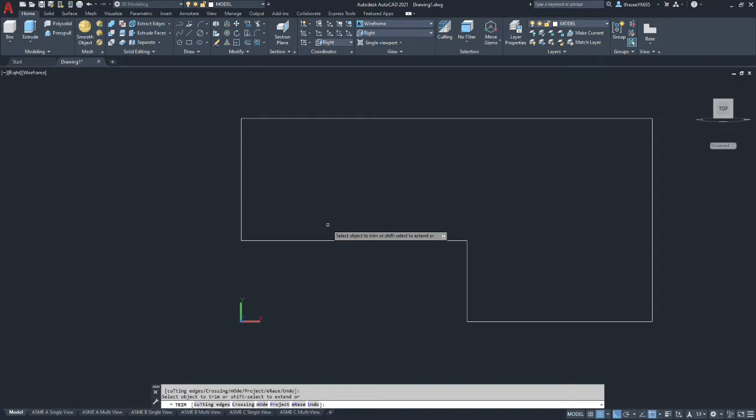Now it does have a radius out here, so we're going to use the fillet tool, and we're going to set our radius as 6 millimeters as the drawing says, and put that on the outside edge.

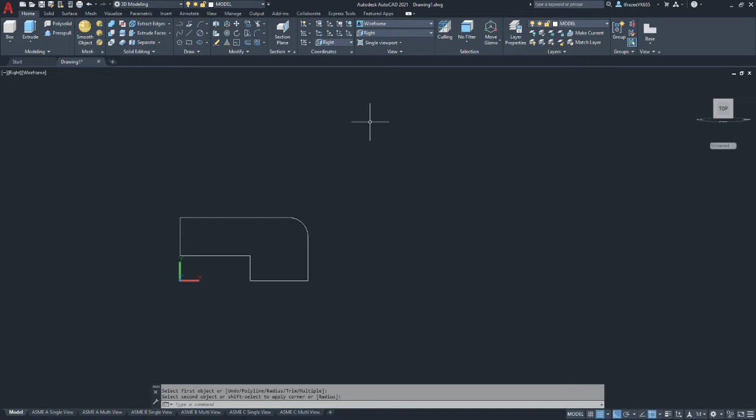Now let's place the circle that will be the handle. According to the drawing, it appears to be 50 millimeters from the base, so let's put in that 50. And then the center of it is 140 diameter, so that's going to be a 70 radius offset from there. So the intersection of those two lines is the center of our circle.

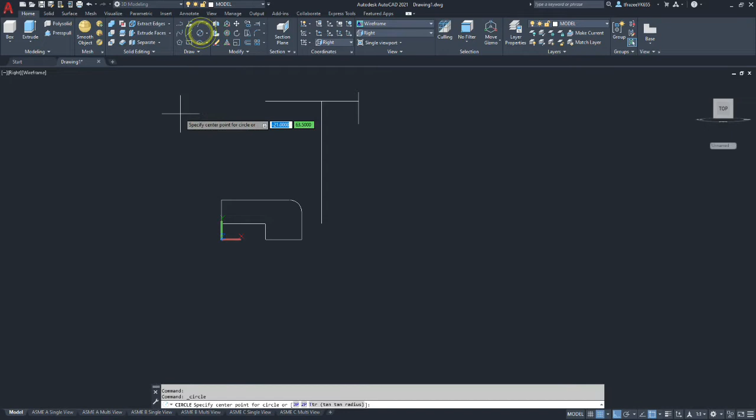So we'll do another little extension here. All right, so where those two lines intersect is where our circle is going to be, and it's a 20 millimeter diameter, so I'm doing a circle by diameter that's 20. And now we can delete these other entities, we don't need them. Okay, so those are positioned in relationship to each other like they should be.

And I do want to throw some other construction in here. Later, we are going to have to make a spoke that connects the hub with the rim, so I'm actually going to switch to construction layer. The hub intersects a point that's on center line 15 millimeters in, and then it picks up the center of the circle. So let's do that, let's offset by 15 millimeters.

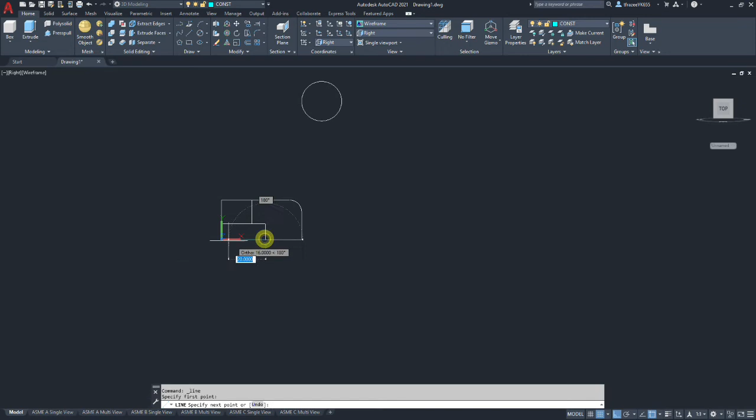So I'm going to draw a construction line that would be on center, and I'm going to extend the line I just offset by 15. So the intersection of those two lines should generate the line we're going to need later.

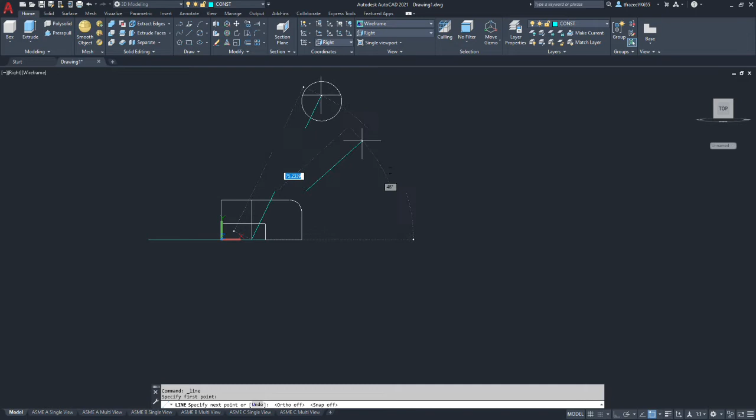I'm going to turn ortho off and the snap grid, and need to have center selected, and I'll draw a line that goes to the middle of the arc. So this line will be a construction line that we can leverage later to make our spoke.

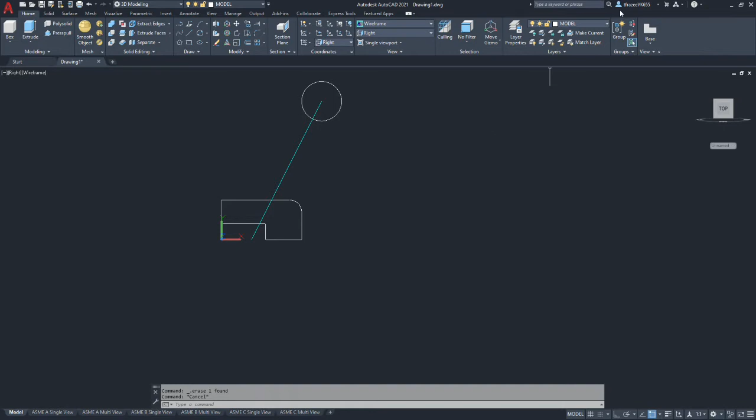So we'll go ahead and delete these other things here. And then I'm going to switch back to the model layer, and I actually think I'll make the construction layer invisible for now.

So it's not there. Okay, so we want to revolve this as a revolve solid. So I'm going to turn this grouping into a region. We're going to go to Draw, Region, and it says, what do you want to make in the region? I select everything, and I hit Enter. And it should be all in one region now.

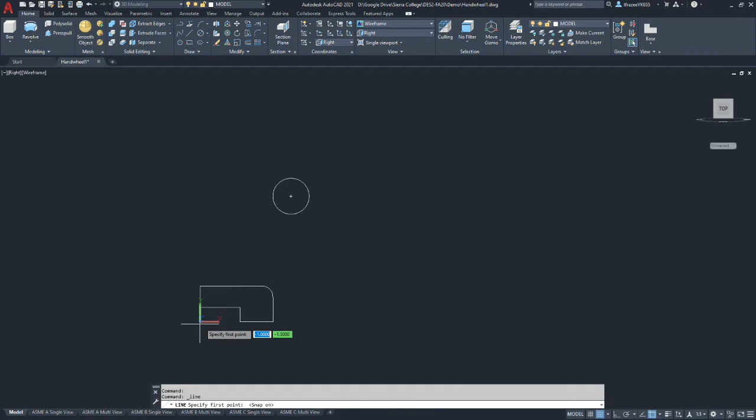All right, so before we revolve this, we need to create a line, and it's just going to be used for revolving. So we'll go from origin over to the right. And that's all that line's for.

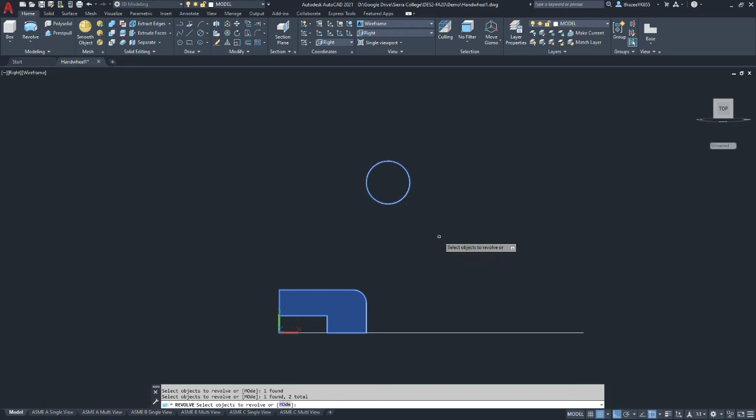Okay, so now we go to the revolve command, and we're going to revolve. We're going to select our region, and we're going to select our circle. We're going to hit Enter to accept those, and then it's asking, what do you want your center of rotation to be? And I want it to be the object I drew, object, and I select my line.

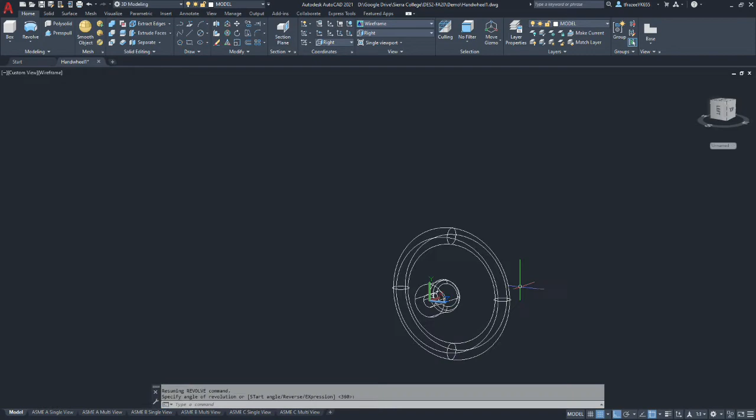And now it's asking you how many degrees you want to go. So I want to go 360, which is the default. So we now have these two bodies. They're not joined together, but we've effectively created two of the bodies we need to make the hand wheel.

Okay, so now we're going to draw one spoke, and we're going to model one spoke, and then we are going to do a polar array on that spoke. We'll have to explode the spoke, its array, and then we should be able to merge them into one solid.

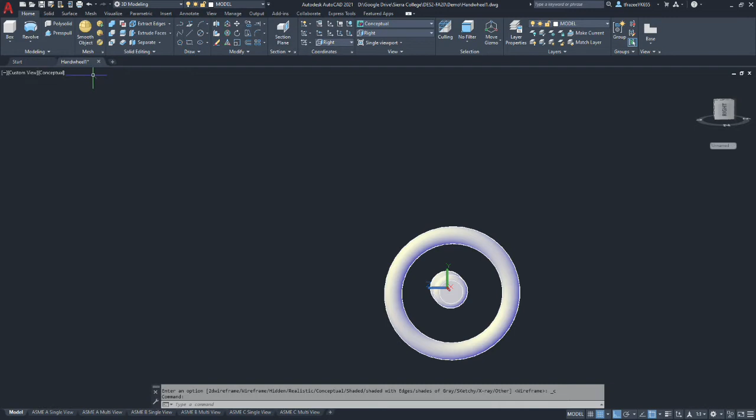Okay, so let's go back to wireframe. And we're going to go back to the view we were in, which was the right side view. So let's go plan. Okay, we're back in our current UCS.

We're going to go back to the layers, and I'm going to make that construction layer visible. Okay, so we have our blue line, construction line we want to use. And we're going to allow that spoke to intersect the other two bodies.

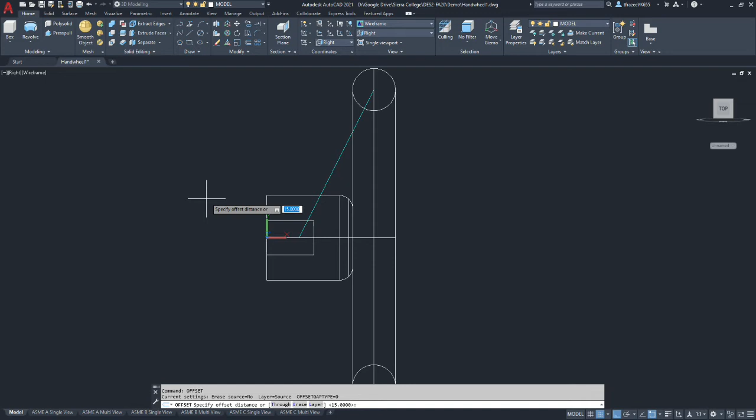All right, so we're going to go to offset. We're going to do offset, but before we do offset, I want to set my layer setting. Layer, and I want the offset to be in my current layer. I don't want it to stay in the construction layer.

And we're going to offset half the thickness of our rib, which is 3.5, and we're going to go in both directions for a total of 7. And now we're going to connect the endpoints. I'm going to turn ortho off and the grid, and we'll connect the endpoints of the piece.

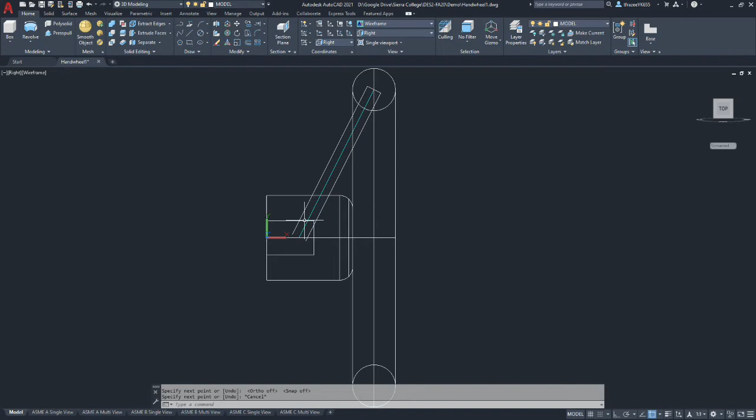Now we don't want to create a solid inside our bore that we already made, so let's create a line on the endpoints, and we'll use that to offset outward. So let's go an offset of 12.

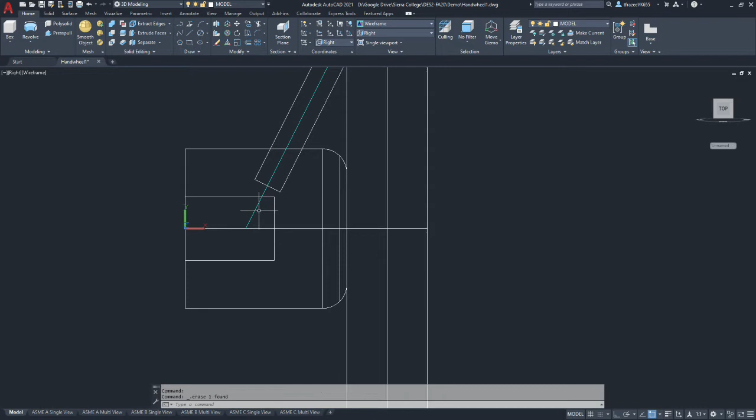Okay, so our bar shape is still going to intersect. What we're going to do now is we're going to go to trim, and we'll trim off these two tails here, and then we can delete the construction line now and the other pieces.

So we have this shape now that is drawn in the right view that we can either use the extrude command or we can use press pull.

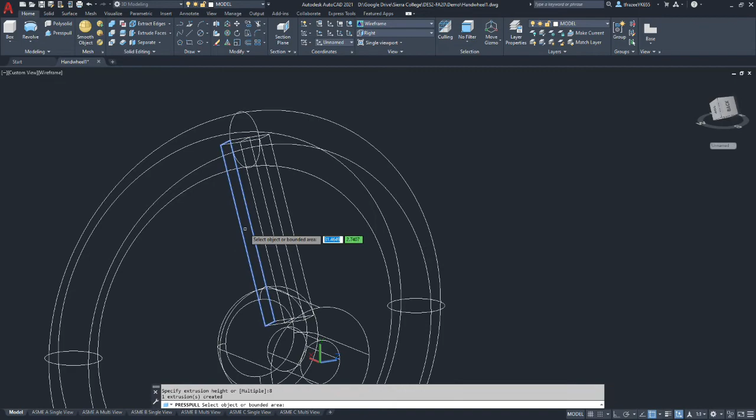So if we use press pull, the thickness is 16 total, so we'll go 8. And then we're going to repeat the press pull on the opposite side, and we're going to go another 8. That gives us our profile. So by doing the press pull on top of the existing press pull, we've created one solid there.

Now we have a dilemma here. We can try to do fillets all at the end, or we can try to do some of them before we do this revolution. I'm going to risk it and put them on this piece because AutoCAD's not the best at doing fillets, so let's give that a shot.

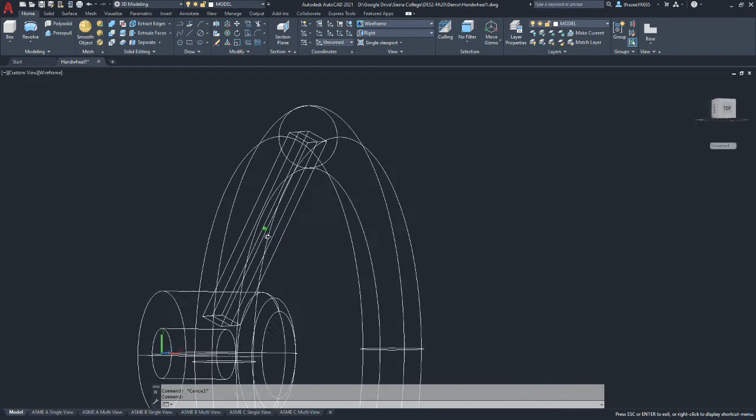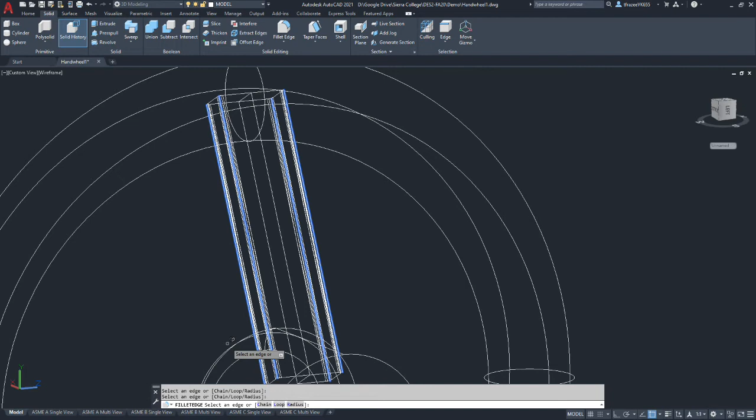So we're going to go to the solid tab, we're going to do a fillet edge, and we're going to pick the 4 sides of the spoke and go ahead and put those fillets on. The radius on those fillets are 2 millimeters. Alright, so we have our 2 millimeter fillets on the feature.

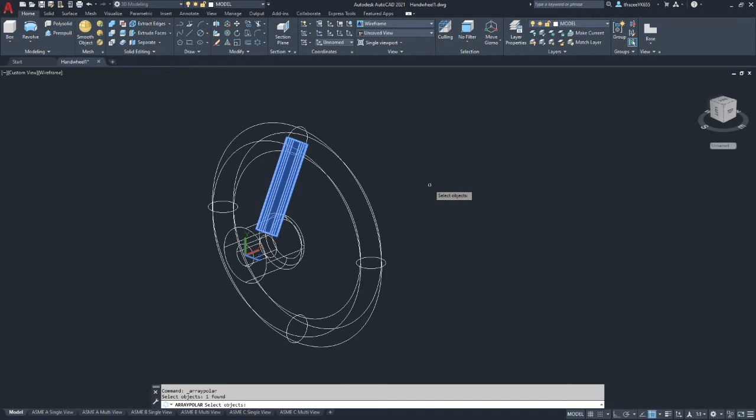Okay, so now we want to do a polar array. We're going to go back home, go to the array, and select polar array. The object we're going to array is the spoke. And we're going to use an axis of rotation. The first point of the axis of rotation will be the center of our bore, and the second one we'll pick is the center of the opposite end of it.

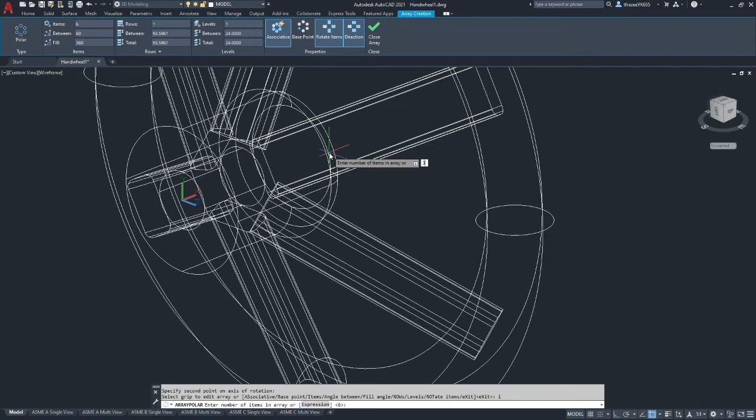Now it's previewing, it's by default making 6. What we want to do is type the letter I for items, and we're going to change it from 6 to 3, and hit enter to exit. So now we have our 3 spokes, and if I change from wireframe to conceptual, this is what we have so far.

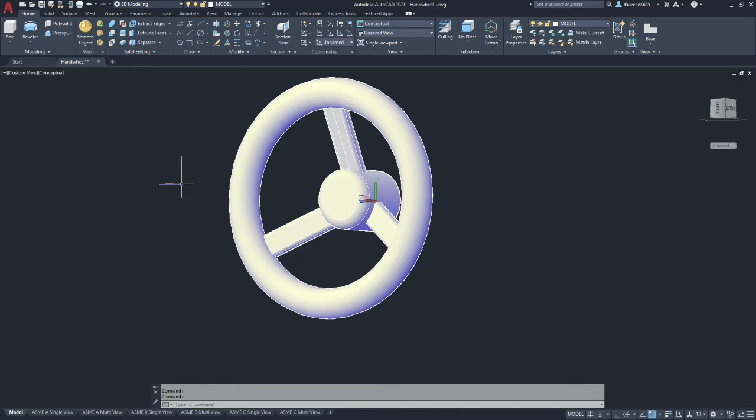All right, now the next step is we need to explode the array because it won't allow us to merge these bodies together otherwise. We're going to go to wireframe, and we're going to type explode with an X, and select our array and hit enter. Now we should have separate bodies for each of the spokes.

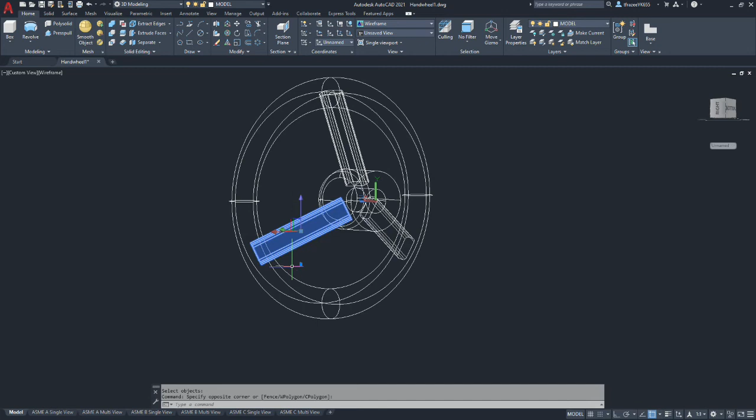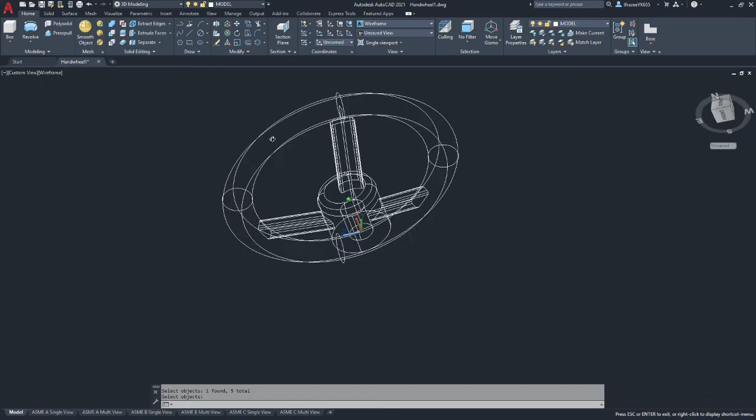Okay, now we're going to do a combined body. This will bring all 5 parts together. So let's union our outside rim with the spokes and the hub. And if everything works, it should look like so. And now we have one solid piece.

Excellent time to save. And I'm going to do a little bit of cleanup on geometry. I don't really want this rectangle here that we made the spokes from, or the circle. So let's get rid of those. Actually, the circle's not there. That's part of the patch line of the solid.

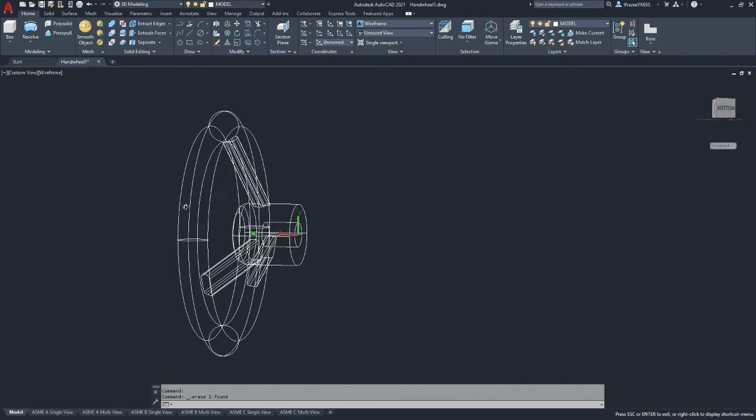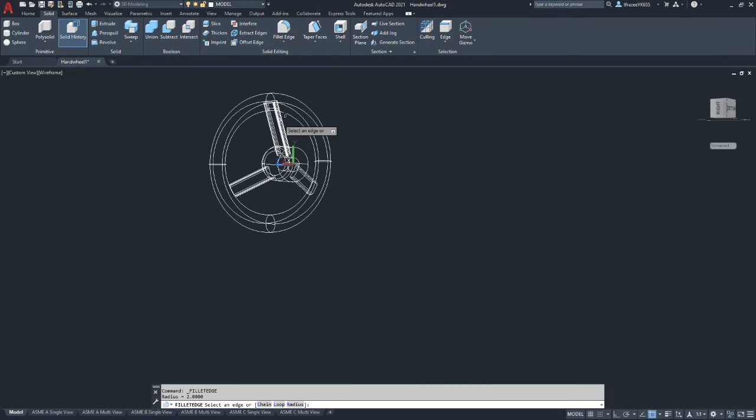Let's save that up, because you know what it is? It's fillet time. We're going to attempt to wrap the fillets around the ends of the spokes. I'm going to save, that way I can come back in. We're going to go to solid, and we're going to fillet edge, and we're going to set our radius as 2. We're going to start selecting edges and see if we can get them to link up.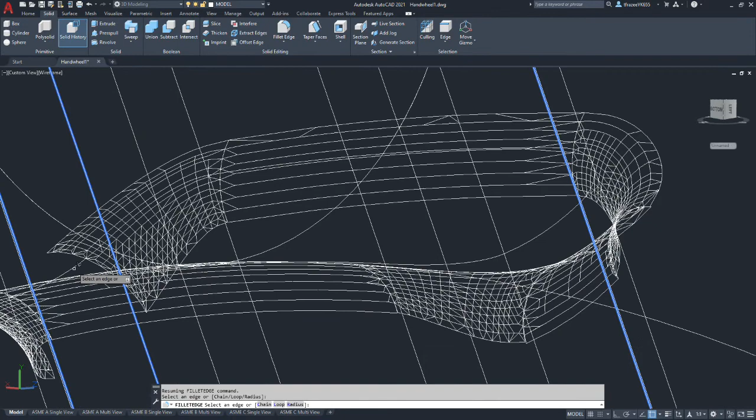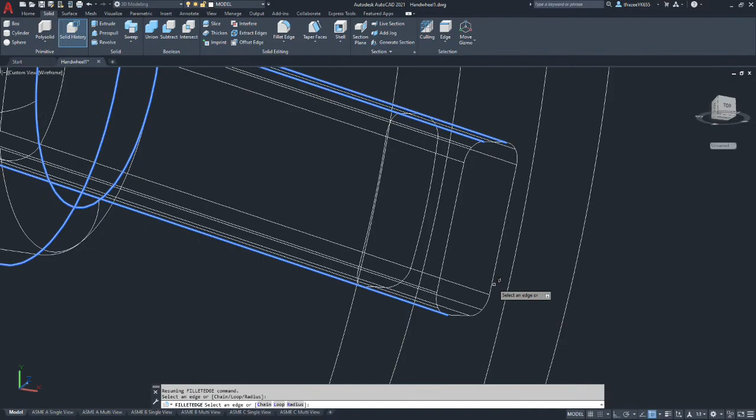At this point in the video, I've sped it up about 4 times, so you don't have to watch me do the same fillet over and over. And wow, I am fast at 4 times speed. We keep tracing around, I don't know. I'm having problems with the graphics card on my computer, so that may be causing those blue lines to appear.

It only happens to me when I'm doing the fillet command. Imagine that. Alright, now let's attempt to do them near the hub.

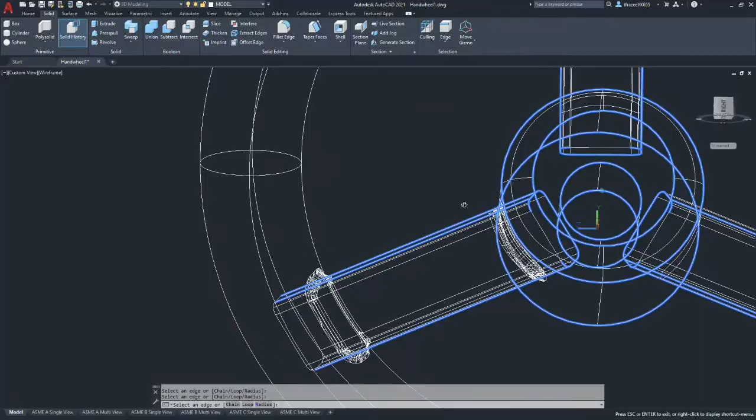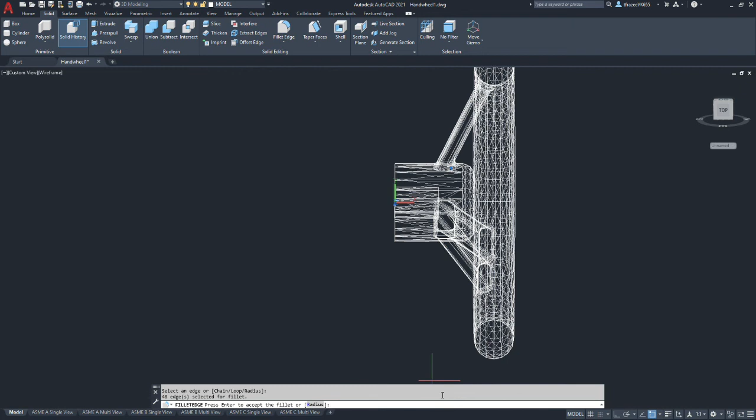Turbo time again, look at him go. Okay, one more, then we cross our fingers and hope it works. It looks like all my fillets worked. We'll go to conceptual. Okay, it looks good. Alright, well, hopefully you have success with that too.

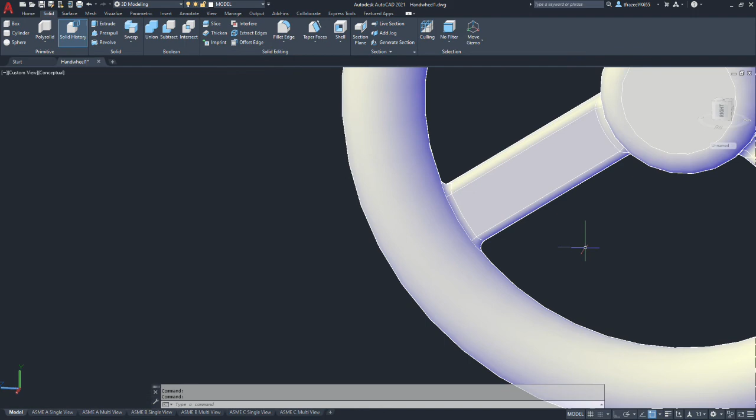And that completes the modeling portion of this tutorial. We'll move into creating the flat shots and the sections in the next segment.